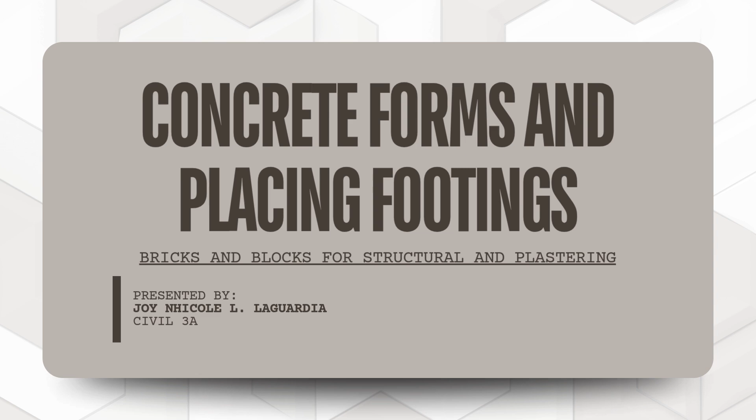So good day everyone. Today I will be discussing concrete forms and placing footings under the subject bricks and blocks for structural and plastering. So basically this topic is about how we properly shape concrete and how we place it, especially sa foundation part ng structure.

So for our objectives, there are three main things we want to achieve. First is to understand how proper formwork and concrete placement affect the strength and durability of a structure. Kasi if mali yun, kahit maganda yung design mo, babagsak lang din.

So second is to explain the proper design and preparation of concrete forms for footings. So dito na yung papasok yung technical side. And lastly, to identify correct placement methods and also common defects. Kasi importante na alam mo hindi lang yung tama but also what can go wrong.

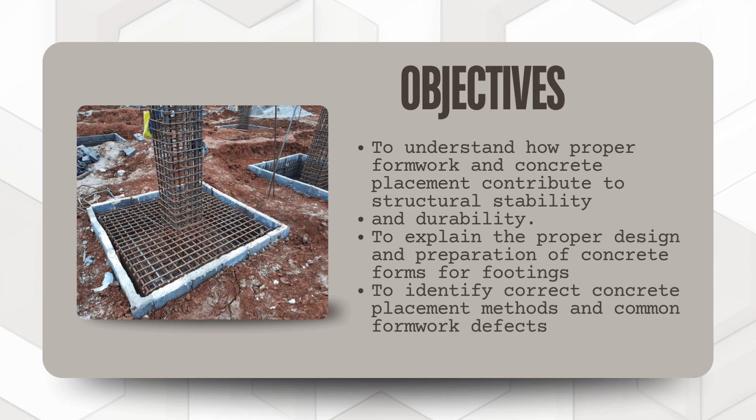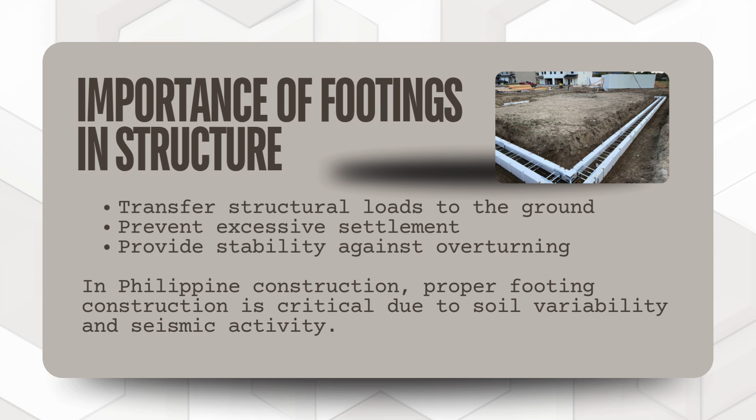So now, let's proceed to the importance of footings in structure. So, bakit nga ba importante yung footings? Footings are responsible for transferring the load of the structure papunta sa ground. So, sila yung foundation, literally. It also transfers structural loads to the ground. Second is to prevent excessive settlement, and lastly, provide stability against overturning.

Next is form design and preparation. Now, this is basically the process of creating molds kung saan ilalagay yung fresh na concrete. So, ano ba talaga yung purpose ng concrete forms? First is to shape and support fresh concrete. Kasi while wet, parang fluid lang siya.

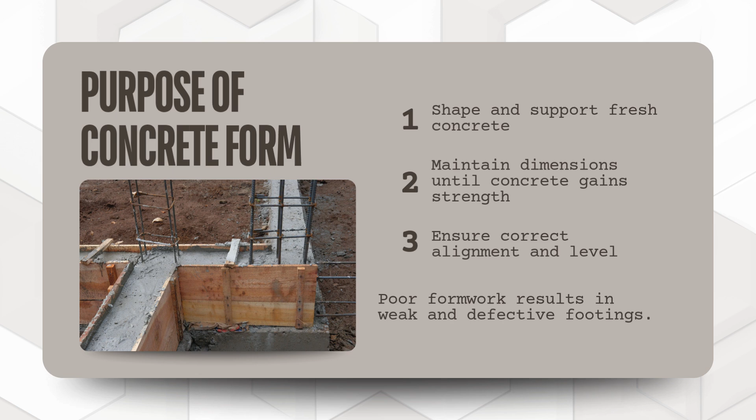Second, maintain dimensions until concrete gains strength. Third is to ensure correct alignment and level. So, hindi tabingi yung alignment, yung structure. At proceed tayo sa types of concrete forms used for footings.

First is timber form. A timber form is a temporary mold made from wood like lumber or planks, used to shape and hold wet concrete until it hardens. It is commonly used because it is cheap, easy to cut, and simple to assemble, especially for small construction projects. Usually, ginagamit nga to, sabi dito sa PPT, for small projects or residential construction. But the downside is hindi siya ganun ka-durable and not reusable many times.

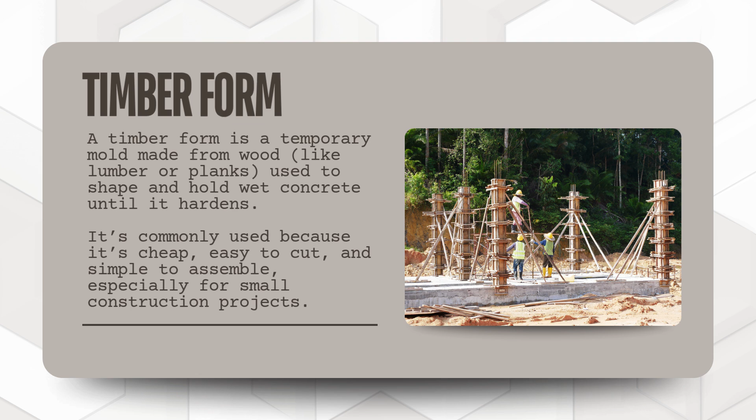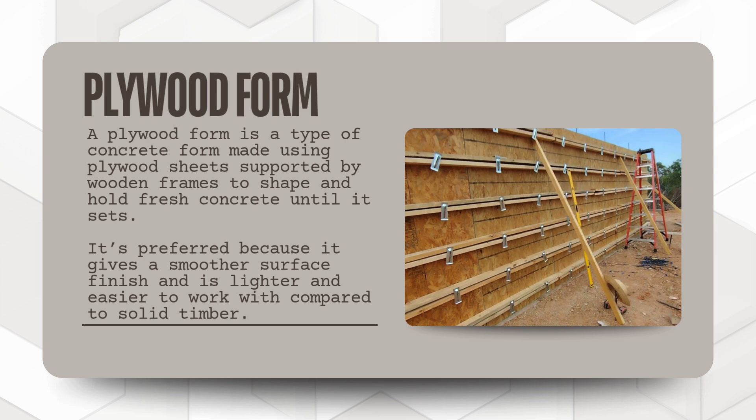Next is plywood form. A plywood form is a type of concrete form made using plywood sheets supported by wooden frames to shape and hold fresh concrete until it sets. It is preferred because it gives a smoother surface finish and is lighter and easier to work with compared to solid timber. So, if you want a better surface quality, mas preferred yung plywood form.

Next is steel form. A steel form is a concrete mold made from metal panels, or steel, used to shape and support wet concrete until it hardens. It is strong, durable, and reusable and provides a very smooth and accurate finish. But it is more expensive and heavier than wood forms. Sabi nga dito, it also gives very accurate and smooth finish. Pero syempre, the downside is expensive siya and heavier. So, ginagamit lang ito mostly sa large scale projects.

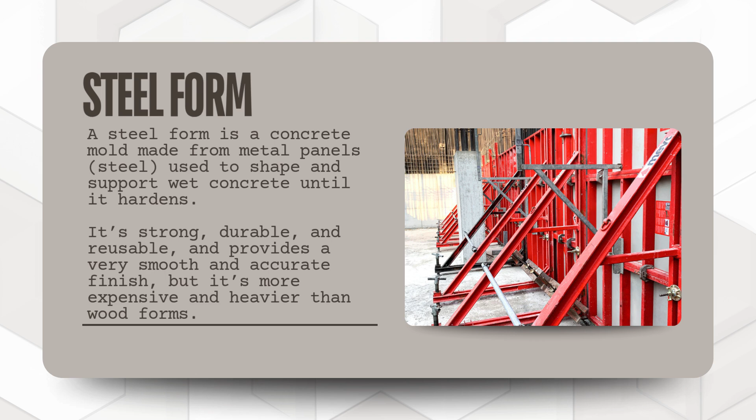Now, let us proceed to form design consideration. Now, when designing forms, we need to consider several factors. First is concrete pressure. Fresh concrete behaves like a fluid and exerts lateral pressure on the formwork. The design must ensure the forms can resist this pressure without deformation or failure. Remember that fresh concrete behaves like a fluid, so it pushes against the form.

Second, footing dimensions. Formwork must be designed according to specified dimension to achieve the required size and shape, ensuring proper load distribution and structural integrity.

Kailangan exact yung size para proper yung load distribution. Gets? Third is ground conditions. The bearing capacity and stability of the soil influence how the formwork is supported. Unstable or soft ground may lead to settlement, misalignment, or structural defects. So, if soft yung soil, pwedeng mag-shift yung forms.

And lastly, ease of stripping. Formworks should be designed for efficient removal without damaging the hardened concrete, maintaining surface quality while improving construction efficiency. Meaning, dapat madaling tanggalin yung forms without damaging the concrete.

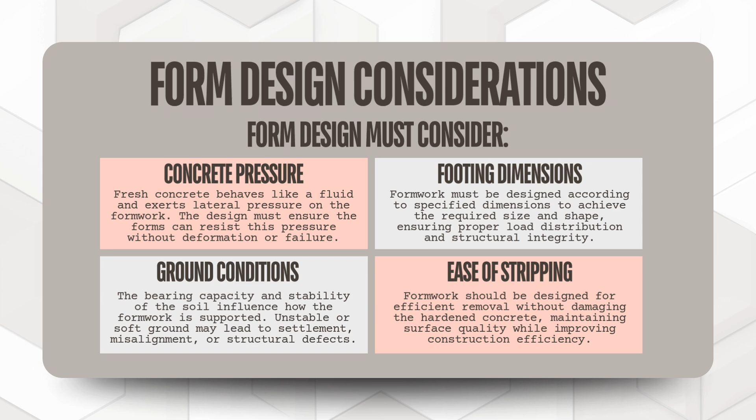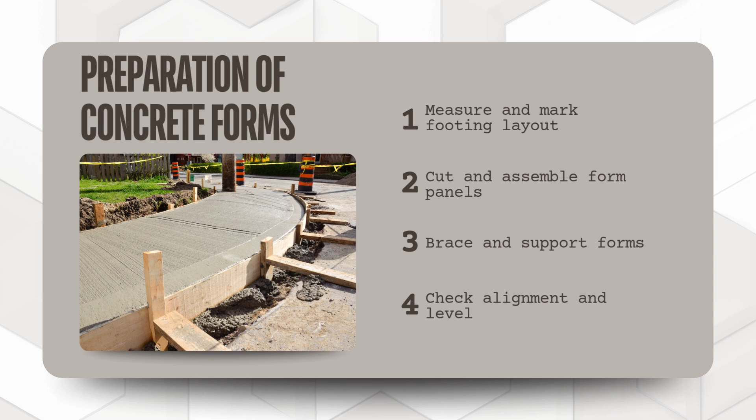Next is preparation of concrete forms. First, measure and mark footing layout. Dito pa lang sa preparation na 'to dapat precise ka na. Second, cut and assemble form panels. Third, brace and support the forms para hindi siya gumalaw. Lastly, check the alignment and level. This prep ensures na straight and even yung footing.

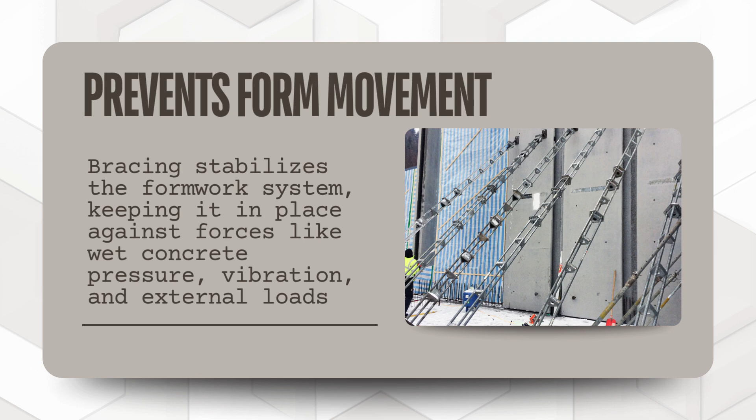Formwork bracing and support. So bracing is, alam naman natin, very important. Why? Because it prevents form movement. Bracing stabilizes the formwork system, keeping it in place against forces like wet concrete, pressure, vibration, and external loads.

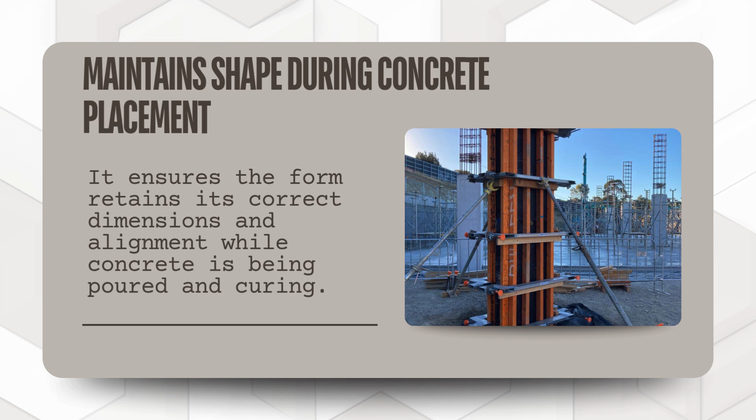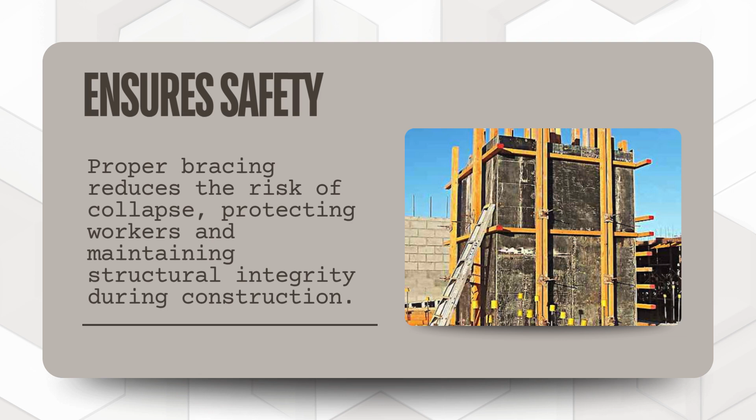Second, it maintains the shape during concrete placement. It ensures the form retains its correct dimensions and alignment while concrete is being poured and curing. Third, it ensures safety. Proper bracing reduces the risk of collapse, protecting workers and maintaining structural integrity during construction. Kasi without proper bracing, pwedeng mag-collapse yung formwork, which is very dangerous for workers.

Common formwork defects. First is the leakage of cement paste. Occurs when joints or gaps in the formwork are not properly sealed, causing loss of cement paste which weakens the concrete surface and reduces strength. This happens kapag may mga gaps sa form, so lumalabas yung mixture and humihina yung concrete.

Second, bulging or collapse. It happens when formwork is not strong enough to resist the pressure of fresh concrete, leading to deformation or sudden failure. Kapag mali yung positioning, affected yung both appearance and structural performance. So, third, misalignment. Improper positioning of formwork results in structural elements being out of line, affecting both appearance and load distribution. This happens naman kapag hindi kaya ng form yung pressure.

Lastly, uneven footing dimensions. Inaccurate formwork setup can cause inconsistent sizes and levels of footings, leading to poor load transfer and potential structural issues. So, kapag mali yung positioning, ay mali, sorry. Ano ba yun? This leads to poor load transfer and possible structural failure.

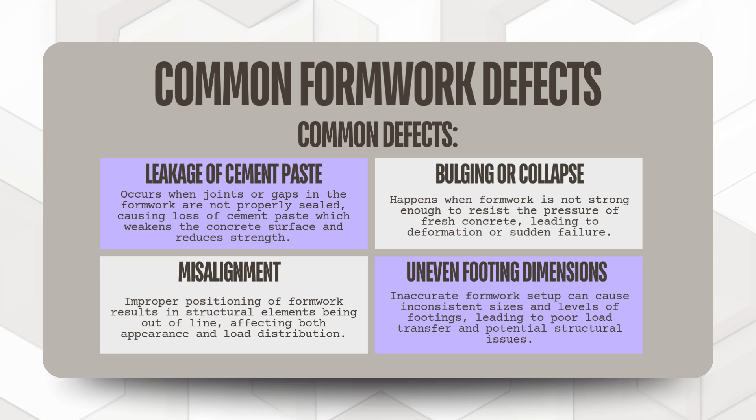Next is concrete placement techniques. Dito na natin actually ibubuhos yung concrete. Preparing for concrete placement. Before placement, first is to ensure forms are clean. All debris, dirt, and excess materials must be removed to prevent contamination and ensure proper bonding of concrete.

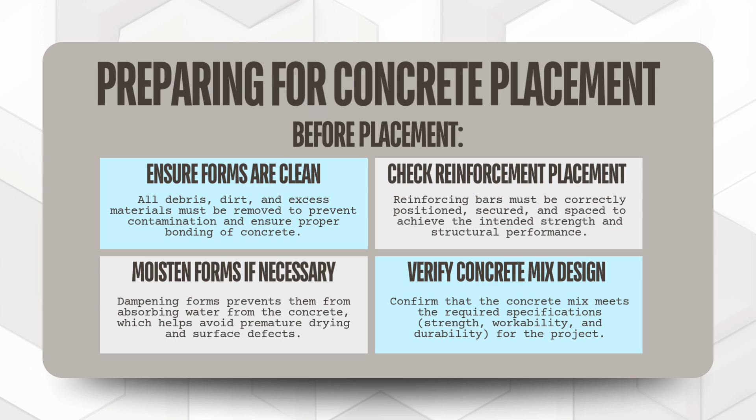Second, check reinforcement placement. Reinforcing bars must be correctly positioned, secured, and spaced to achieve the intended strength and structural performance. Third is moisten forms if necessary. Dampening forms prevents them from absorbing water from the concrete, which helps avoid premature drying and surface defects. Lastly, verify concrete mix design. Confirm that the concrete mix meets the required specification, strength, workability, and durability for the projects.

Next is methods of concrete placement. Wait. First is manual pouring. Second, buckets or wheelbarrows. Third, pumps.